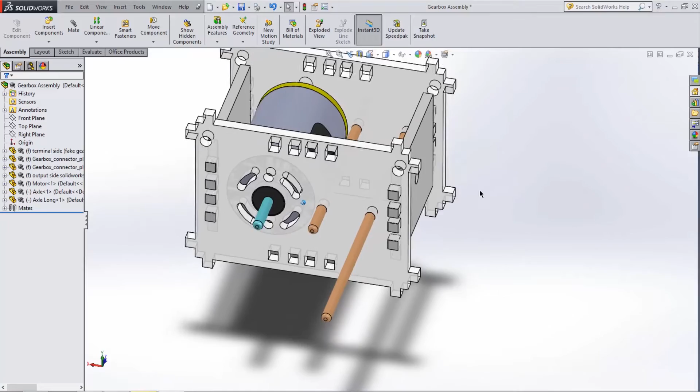In this video, we will expand on the gearbox assembly we made in video 1 by adding some more components. We will add a motor and the shafts, as you can see here. To do this, we will use a different kind of mate, known as a concentric mate.

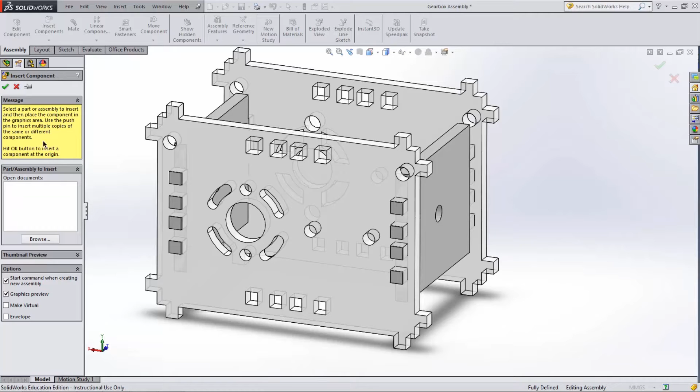Let's get started. First, let's add the motor part to the assembly. Select the Assembly tab and then select Insert Components. Browse to the motor part and add it to the document.

Now we must add our first concentric mate. A concentric mate is one of the simplest and most commonly used mates in Solidworks. What it does is simply align two circular faces with each other about the same center point.

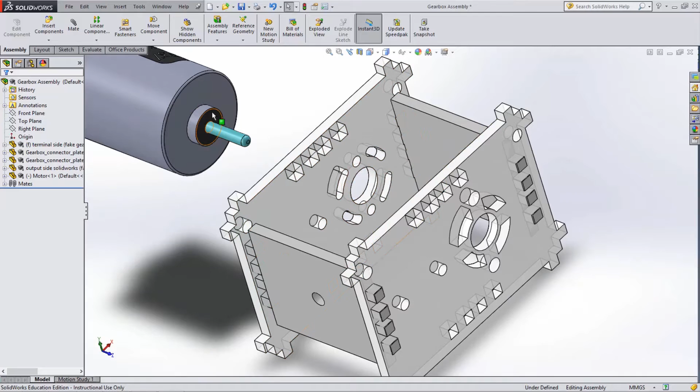To make the mate, first select this face next to the motor shaft, and then select any of the edges of this circular hole on the housing. This will bring them into alignment, but notice how the motor is pointing the wrong way.

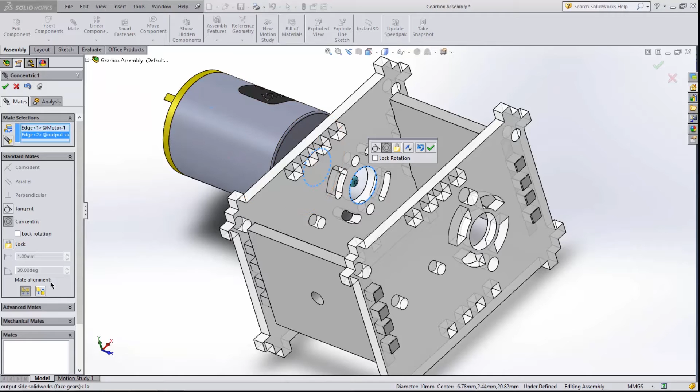To correct this, we use a feature known as mate alignment, which can be found here. This simply reverses the direction of a mate. Click the button and the mate will flip into the correct position. Finally, click on the green tick to say that we are happy with the mate.

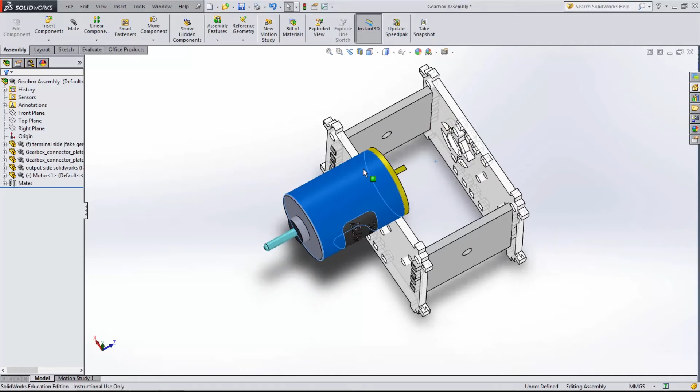We now have the motor aligned around the correct center point, but it's still free to move forwards and backwards. We will need to use a coincident mate to fix it in the correct place. Select the outside face on the gearbox housing and then select this face on the motor. This will fix the motor against the outside of the gearbox housing where we want it.

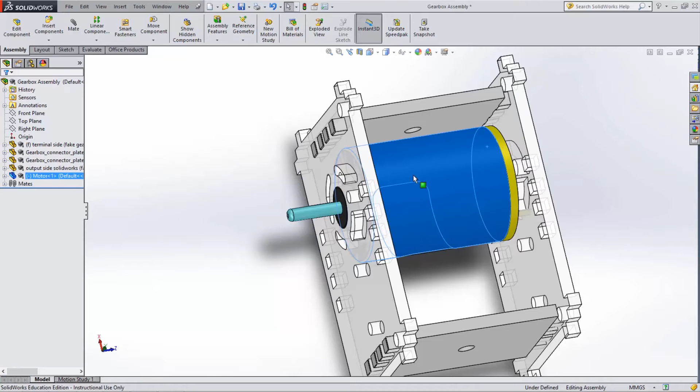As you can see, the motor is still free to rotate. We will need to add a final mate to secure it in position. To do this, we will use something known as a lock mate. A lock mate maintains the position and orientation of two components. It simply locks them together.

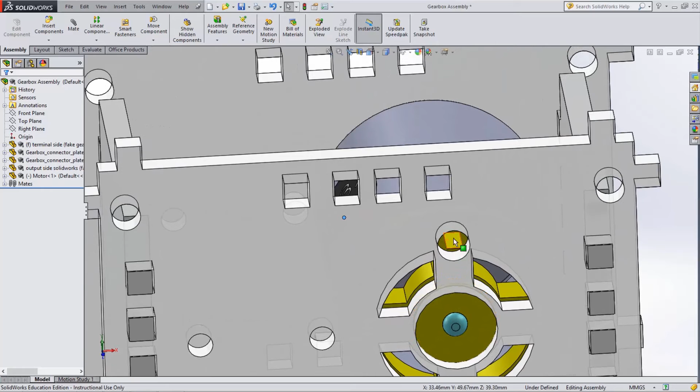We want the motor terminals to stick out of the two holes on the terminal side, so rotate the motor with your mouse until they are in the right place. Then select one of the tabs and the outside face of the housing. Select Mate on the Assembly tab and then select Lock. This secures the motor fully in place.

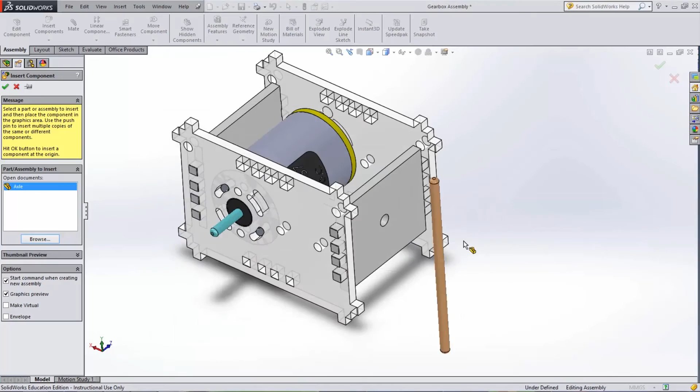Now that the motor is fixed, the axles need to be added. Browse to and insert the part called Axle. It needs to be concentric with either of these two holes. Control select one of them and the axle and then secure it using a concentric mate.

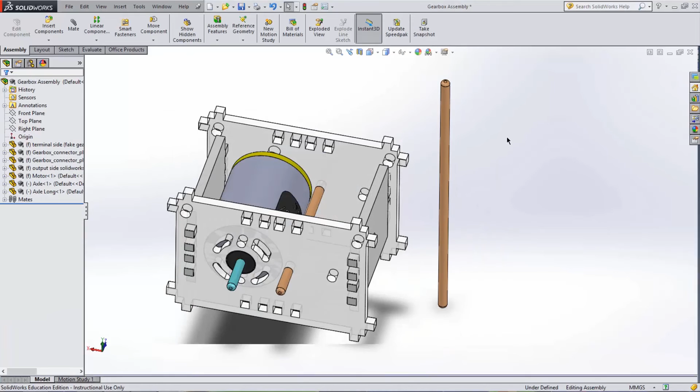Next, browse to the part called Axle Long. And control select both it and the back hole and then select concentric mate.

The axles are not going to be secured in place for now, and they are still free to move forwards and backwards. This is because in a future video, gears are going to be added to the axles before we finally fix them in place. That's it for now. Thanks for watching.